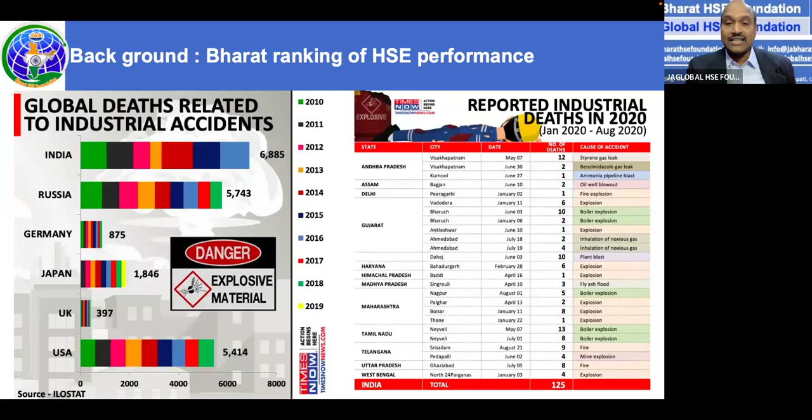As you see on the screen, there is an ILO, International Labour Organization, statistics. Unfortunately, India is on the higher side. And remember, these are only the reported incidents. There are so many unreported incidents happening, but our main aim is to support the industry, support the HSE professionals, and support the HSE fraternity.

With that aim, we started our foundation. It was virtually launched on 25th March 2022. Again, during COVID time, everything was virtual, so we adapted virtual significantly for the benefit of our HSE profession.

That was Bharat HSE Foundation. Further, based on requests from different parts of the world, we started a Global HSE Foundation on 30th November 2022.

This particular foundation is not at all a membership organization. You don't need to pay anything to get the benefit from this. We are only giving back to the profession in association with professional organizations, corporate organizations, academic institutions, individuals like Dr. Hari joining today, philanthropists, NGOs and other things. So it's purely a giving back organization, no need to pay anything to join our fraternity at all.

And we have a mission, vision, and objectives. Our mission and vision is very simple: to support the HSE profession as well as HSE professionals, basically to do advocacy for our profession. Our objectives are advancing occupational safety and health among industry, academic institutions, and organizations, to support and promote OSH as a career choice among students, to inspire and develop leaders, to provide education and development opportunities. We also recognize individuals.

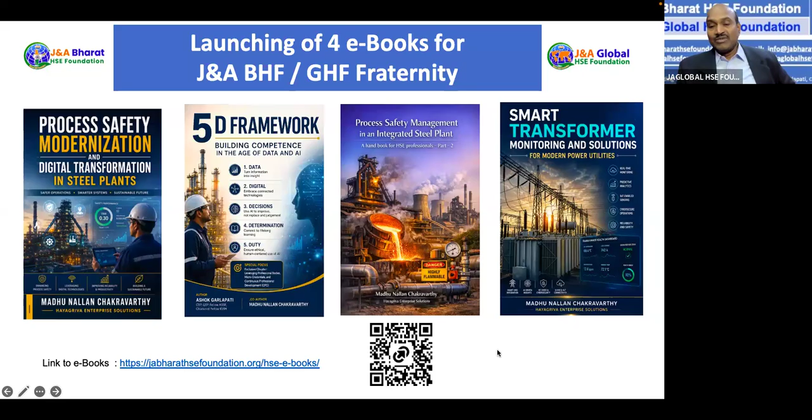We will be going ahead with understanding reactive hazards of chemicals and process safety management, a must-know for HSE professionals. Jitu Saab, are you ready to speak? I think you covered it all. The only thing I was going to add is that this is an excellent tool for developmental programs for students as well as full-fledged HSE professionals. They can further expand their knowledge from these books and use them as reference material.

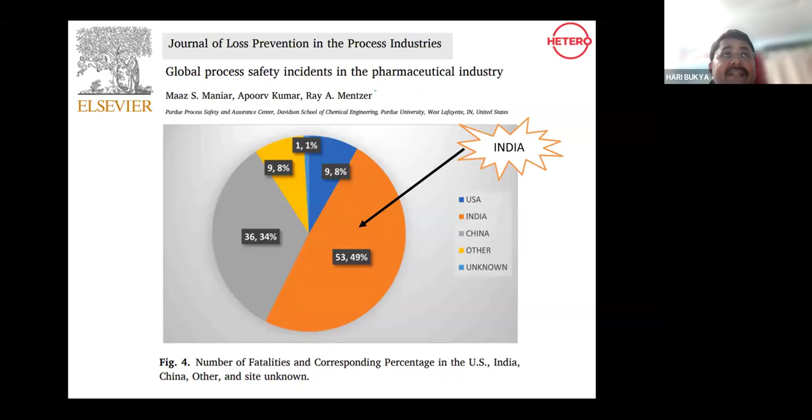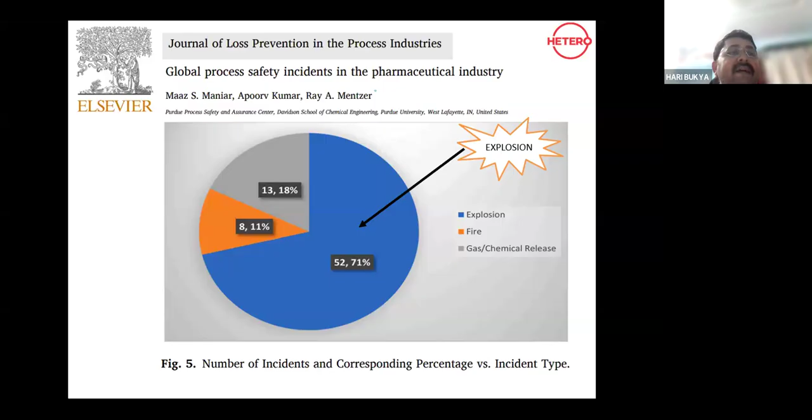This slide tells you which category the incident belongs to—maybe explosion, fire, gas, or chemical release. So again, there is an explosion. Nowadays, anywhere an incident happens in the world, India is playing a major role in incidents and fatalities. This one again shows the type of incident—explosions happening in India. If you see this in Hyderabad, Telangana, Andhra Pradesh, or Maharashtra, Gujarat—wherever the states—any incident that happened involved reactor explosions. This is the way I articulated it, collected from elsewhere in the journal.

So whatever we are doing right now—hazard awareness, I'm doing it, and you are going to do the identification, in a simple way. J&A Bharat, and also J&A Global, gives people a global opportunity and awareness about whatever hazards we have in safety, giving the best way to address it. So a hazard awareness and identification program can decrease global incident rates, fatality rates, and accident rates.

So it's the latest update, in May 2025, 13th May—the Maharashtra government has made some amendments. For every chemical reaction, if the occupier carries out any exothermic chemical reaction for the first time in the reactor or anything, they have to do a minimum basic process safety assessment.

So before going to the subject, there are a few slides. After these few slides, we'll move directly to the subject. This is the basics to help you understand why process safety is important.

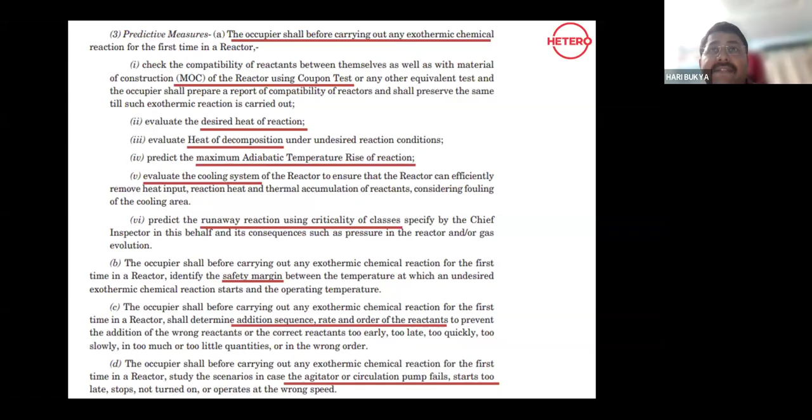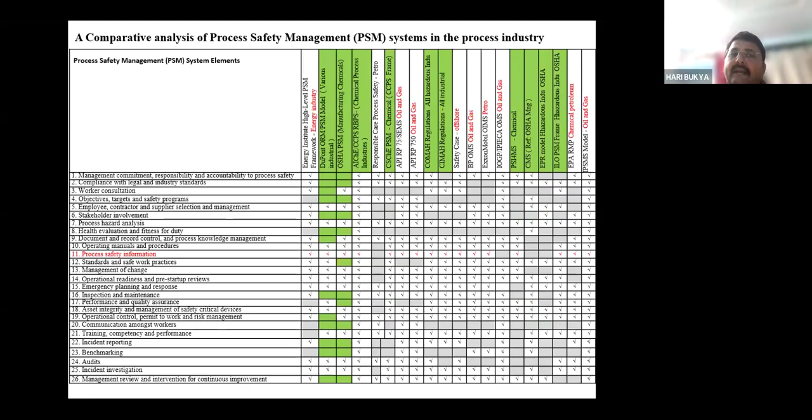Again coming to the topic of comparative analysis—many people say you should do HAZOP, please do HAZOP, please do ABR (activity-based risk assessment), do HAZID. Whatever the standard, we do it. But before going further, coming to a comparative analysis of process safety management systems in the process industries—in the world, there are 20 standards.

If you see in the first row, there are 20 standards, and in the first column, 26 elements. So which is the best one? It's mentioned that models like OSHA, CCPS, DuPont's, and ILO are more robust and more flexible in the pharma and chemical industries, as I mentioned.

If you see this in a graphical way, it shows which model is more robust and more flexible with respect to implementation of process safety management in the plant—whether for chemical, pharmaceutical, petrochemical, or oil and gas industries. So we can select based on this table. The IPSMS model works for oil and gas. The EPA RMP model works for chemical and petrochemicals. OSHA's, DuPont, and CCPS work for the chemical and pharmaceutical industry.

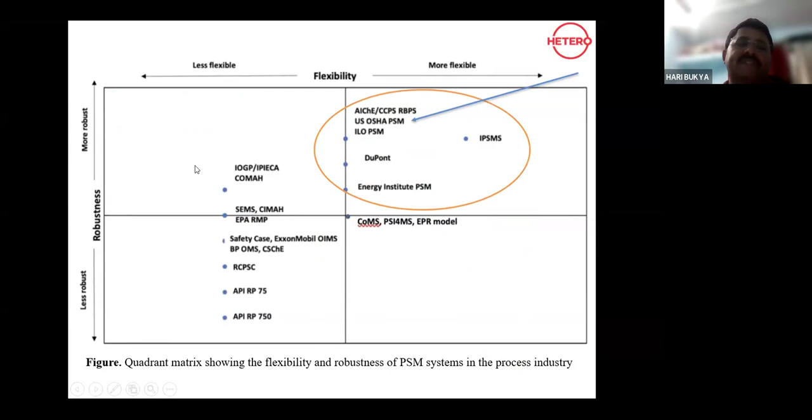So these are the mappings done with respect to 20 standards in the world, having 26 elements mapped on the screen. This gives a glimpse. I need to choose - my industry is this. I'm from a steel plant, I'm from a textile industry, I'm from a pharmaceutical. So we can choose it, and the best and robust one mentioned with respect to the manufacturing sector, like DuPont and Energy Institute PSM and CCPS OSHA, which have more flexibility and robustness. So this is a glimpse of the standards in the world.

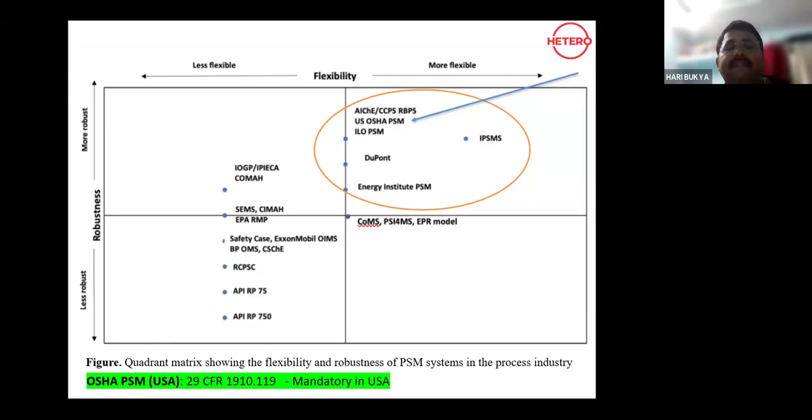If you see this, it is not mandatory in India to follow process safety management. We have the Factories Act 1948 as per the sections, which has different sections that we follow in India. But particularly in other countries, they have it mandatory, like in the US.

Coming to the part of risk assessment, in the early stage I told you many people talk about risk assessment - sir, I want HAZOP, I want HAZID, I want JSA, I want ABRA, I want what-if, FMEA, LOPA, bow tie. There are a lot of things, not all able to fit on the screen, that's why I've written only a few.

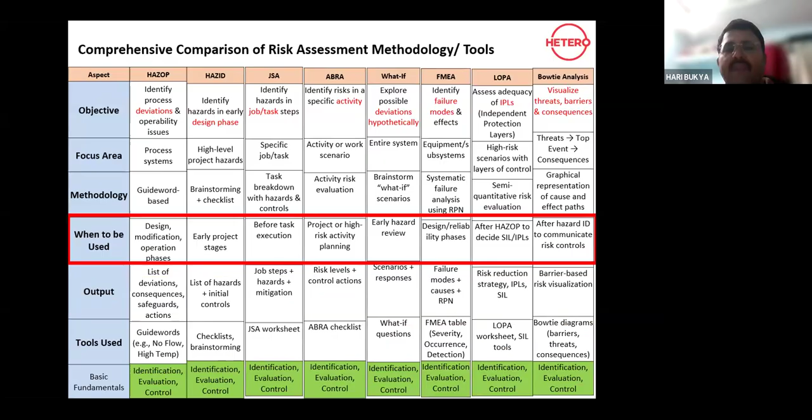If you see this, everything has a specialized use - when to be used, simple way. HAZOP I need to use in design and modification phase. HAZID I need to do in early project stage. JSA, before task. So any non-routine activity, this has a significant role - JSA. Any non-routine or routine activity, you can capture it with job safety analysis. Any routine activity you can do in ABRA, or what-if analysis for your process or anything you manufacture. So every tool mentioned here has a significant role for when to be used.

But the basic fundamental of any tool is the risk assessment definition - identification, evaluation, and control. Simple way, as we are learning in this session. So any tool, if anybody tells you they want to do something - design, project, high risk activity - you need to decide if it's a SIL activity or hazard communication, whatever we do, the simple way is we need to understand what risk assessment is. I need to identify, I need to evaluate, I need to control. So we put this in different formats - this is the comprehensive risk assessment methodology tool mentioned here.

Moving to the next one, which is the basic approach of process safety management standard. Every company has different types of understanding. In chemical and pharmaceutical industries, company to company, the process safety management standards which I mentioned in the previous slides - there are 20 global standards we have, and 26 elements we are mapping in that, right? So OSHA, CCPS, DuPont, maybe Energy Institute.

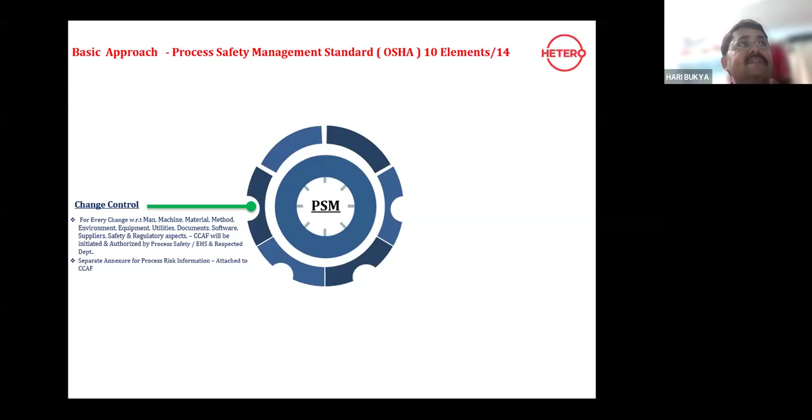If they want to change in man, machine, method, like all the M's, with respect to any physical scenarios or situations as well - immediately, based upon that, we give a recommendation, whether it is a process, an activity, a procedure, or equipment changes.

Based upon the change control approval, immediately I need to gather process safety information - data like thermal stability, reaction calorimetry data, powder safety data, gas evolution data, stoichiometric balance, compatibility charts, nitrogen blanketing, emergency vent sizing, condenser vents, occupational exposure limits and bandings, P&IDs, PFDs, and interlocks. I select whichever is fitting based upon the particular activity change.

So you need to do the HAZOP or HAZID, as mentioned in the previous slide. If we want to do activity-based risk assessment, we do HAZOP, job safety analysis, what-if analysis - whatever is selected, we apply it for that specific activity to ensure compliance.

So process safety information followed by process hazard analysis. Whatever we developed in the process safety information and process hazard analysis was kept into the operating procedures. Now coming to the operator - he may not be a chemical engineer, he may not be a chemist standing in front of a reactor. He's manufacturing pharma or medicine in the plant and doesn't know the chemistry, so he needs to understand it.

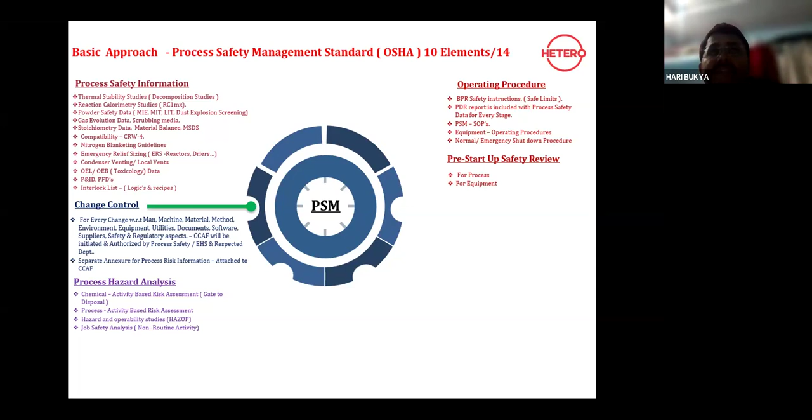And then when the process starts, we do pre-startup safety review, PSSR, with respect to process and with respect to equipment. So this is the basic one.

When you involve this, it immediately captures employee participation - the employee involved in PHA, the employee involved in the operating process. This employee participation is captured through involvement in PHA, incident investigation, mock drills, safety committee meetings, near miss reporting or process safety near miss reporting, and PSSR - shown in the right side, down third row of the screen.

Similarly, any incident happens, the investigation, or mechanical integrity parts with respect to preventive maintenance, calibrations, inspection for reactors or atmospheric pressure storage tanks for solvents, acids, chemicals, pipelines, stack lines, or valves and equipment. Whatever equipment I'm putting as asset integrity part, we call mechanical integrity - that plays a major role compared to all others.

This will be made as a chart and produced block-wise, and if required, product-wise as well. So simply, we are training them on shop floors in process safety - we train on process, we train on equipment, and we give hazard communications particularly with respect to process. This may be a classroom session or a toolbox talk for contractors or employees.

So this captures element 9, and the next one is emergency preparedness. Whatever emergency shutdown - process safety mainly concentrates on emergency shutdown in case a runaway reaction happens, what needs to be done. That includes shutdown procedures, on-site emergencies, off-site emergencies, evacuation plans, assembly, ERT, and mutual aids.

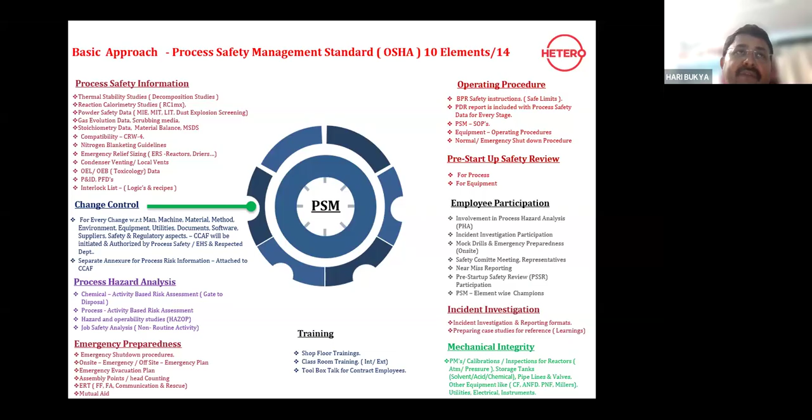So this is what I've shown with respect to OSHA's PSM approach, and this is the CCPS part. Whenever you choose the standard, CCPS and OSHA are almost similar, but CCPS has a few more elements, elaborately split into 20 elements, based upon your commitments and choices. There's a bit more thought, a bigger one, but still easy. When I was in Pfizer, I used to follow the CCPS standard, but now in India it's not required - because the need is, for lesser quantity, OSHA is preferred for pharma, chemical, or any manufacturing industries as part of process safety management.

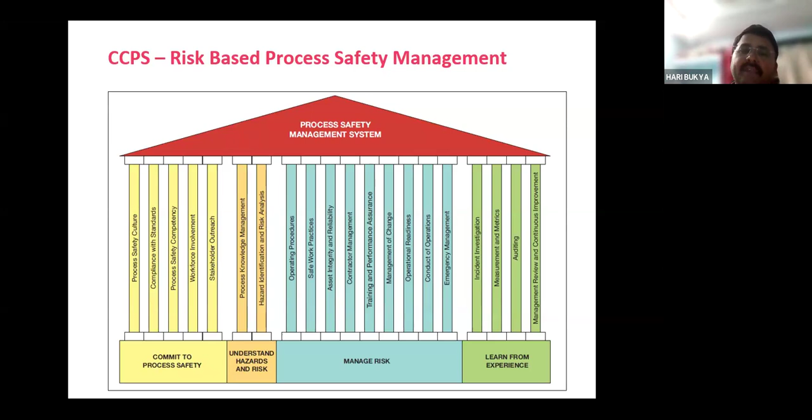Before going to this, I have a small story - the Chota Bhai, Bada Bhai story, sir. I think everybody is listening to the story - Chota Bhai, Bada Bhai, a lesson in safety culture.

This Chota Bhai is a very naughty guy, and he intentionally asked many things. He's very curious to learn, and this Bada Bhai was very intelligent to answer his questions. Chota Bhai asked Bada Bhai...

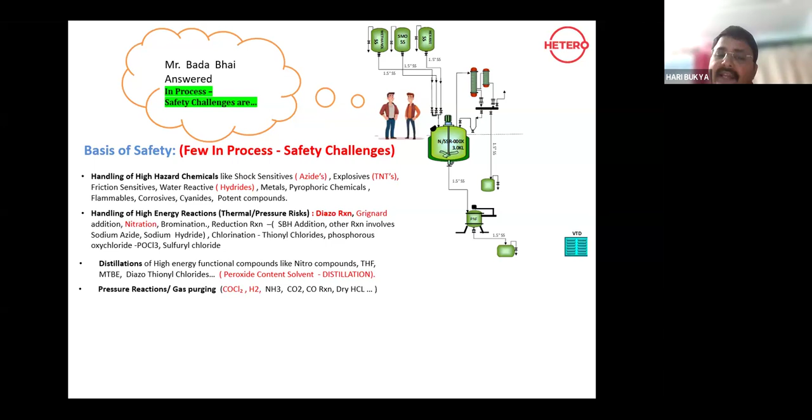Coming to another challenge we have: pressure reactions, with respect to hydrogenation and CO reactions, is a challenge. Handling utilities is also one of the bigger challenges - to cool adequately and timely. If you're not provided cooling for exothermic reactions, again, it's a bomb.

Powder handling, cross contamination, improper handling. One explosion happened in a company in Hyderabad, a pharmaceutical. They were doing the 24th batch. The reactor is empty. They are charging some chemical, some powder, into the reactor. They had not cleaned it properly.

I'm going a little fast. If you're okay with that, that's better, otherwise I'll slow down. So the thing is, they are charging material. Sorry sir, go ahead sir, go ahead.

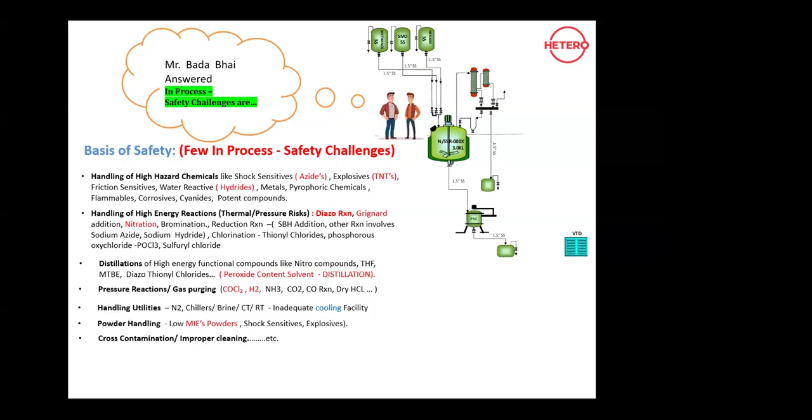So in the reactor particularly, it's an empty reactor, the 24th batch they are doing. They charge almost 13 bags into the reactor. On the 14th bag, during the charging of powder into the reactor, it got exploded badly. The entire building collapsed. We went for an investigation.

We came to know that after this, the contract casuals generally clean the reactor. After his cleaning, he says okay. Once he says okay, the supervisor says okay, the block manager says okay, the block head says okay - but the signatures were carried out without actually checking.

During discharging, the reactor contained the previous chemical called toluene. Toluene is a highly resistive material - it's a non-polar solvent, it generates static. Already there was powder present, so during powder charging there was charge generation. The reactor exploded, the entire building collapsed. There was huge injury but fatalities were luckily avoided since they were safe.

In process, high pressure - during high pressure reactions, generally people want to take samples. That was one challenge I faced when I was at Pfizer in the hydrogenation process. During high pressure, I want to take a sample, but I cannot reduce the hydrogen pressure, I cannot take it. So that kind of thing happens in process - otherwise during the process I need to open the manual or do some activity, it's a challenge.

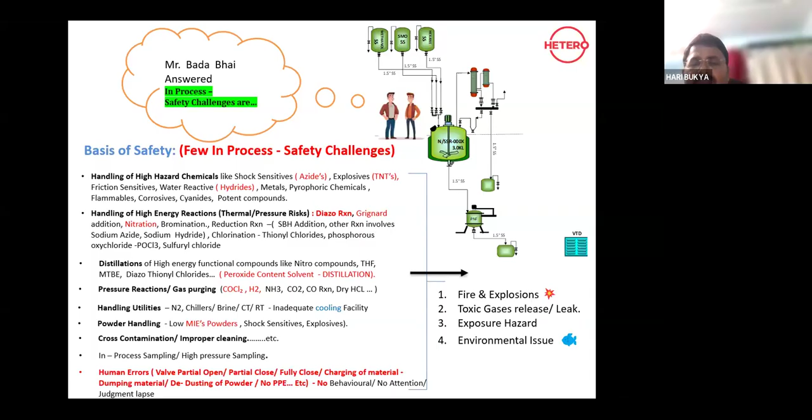These are a few of the in-process challenges. Finally, any of these challenges result in fire and explosion, toxic gas release, and exposure hazards.

So I'm just getting into the subject. I haven't started the subject yet. Let's go into this, and after this slide, we are going to have an understanding about our real subject of chemical reaction hazards.

So now, these are the minimum in-process challenges. This slide will help many people understand the typical basic unit process and unit operation flow in a chemical and pharmaceutical industry. There will be a reactor called raw material charging in one reactor, which I'm showing as the first reactor. Then it comes to synthesis, where the unit processes will happen.

Unit process will happen, and then we will come to the workup. The remaining, which is all our unit operations, like workup operations, organic layer, aqueous layer, distillation, crystallization, maybe filtration, drying, maybe milling, mixing, sieving, and finally packing. This is unique, meant to make you understand if you're not from chemical or pharma industries. This will be a typical basic process, unit process and unit operation flow in a chemical and pharmaceutical industry, sir.

Is it okay? Voice is audible, sir? Screen is clear? Yes, perfect. Go ahead. Clear, sir. Yeah, clear. Fine, sir. Clear. Yeah, we have not yet started the subject, sir, and please, it's a very curious one. We have not yet started the subject.

So before going to the subject, we started working on the process safety package. So any new product comes, any recampaign comes, any modified process comes, or any product which is continuously happening in the plant, it may be a chemical or pharmaceutical industry, this package PSP - I named it process safety package.

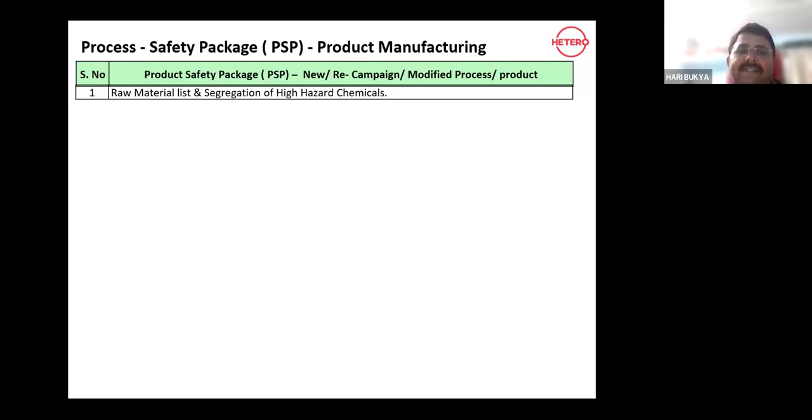First, he has to get the minimum raw material list. He has to make a Bible on this. So the process safety package is a Bible of that entire process - we need to do raw material list, segregation of high hazard chemicals, MSDS, chemical compatibility with support of CRW4 software, or any other software supports well and good.

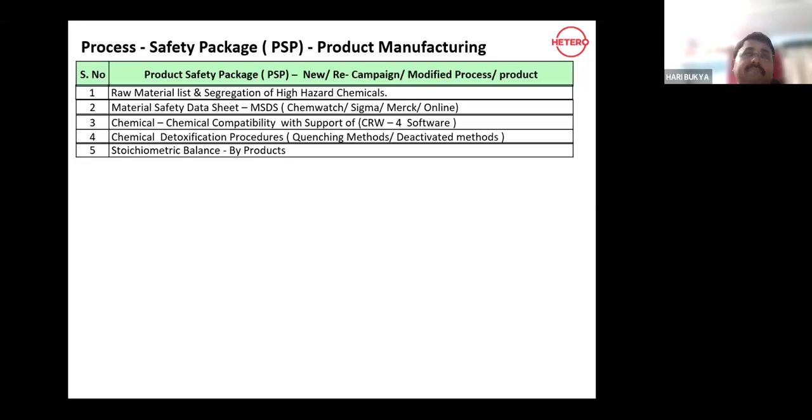Detoxification procedures of your quenching materials or deactivation methods of the process, stoichiometric balance and byproducts, gases related, emergency relief system calculations or local vent calculations or dump tank calculations, industrial hygiene data like occupational exposure bandings or occupational exposure limits with exposure controls and recommendations, particularly if your material is highly potent.

In the process safety data, you need to generate thermal stability data, reaction calorimetry studies, powder safety studies for RMs, KSMs, intermediates and APIs. Many people ask, so I will do only API. Then my question is, what is your basis of safety?

If somebody asks what is your basis of safety - yes, I handle a powder. If you ask me the basis of safety for KSM, because KSM is only used in the reactor, it may not be used for the powder processing. So that's the reason I'm just putting this word with you all.

You need to do the process evaluation checklist, particularly with respect to process and equipment. You need to gather the P&ID as per the standard, maintain the PFDs, and conduct HAZOP or maybe any other suitable tool, along with effluent generation data and coupon tests.

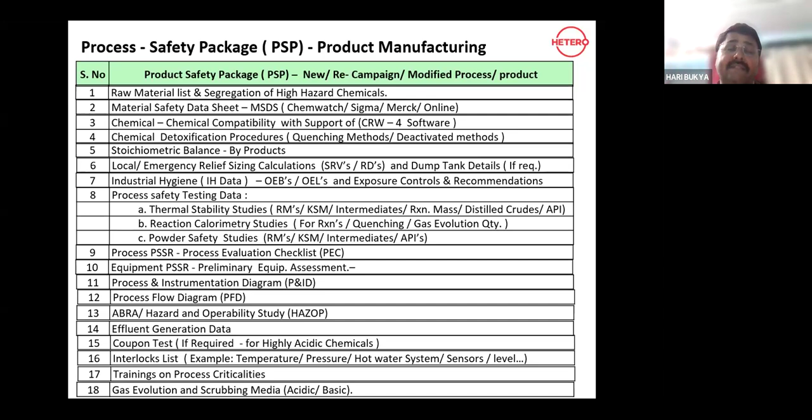So these are the few things. If you can generate more, well and good. These are the basic process safety package requirements for product manufacturing in the manufacturing plant. This gives you entire knowledge of your subject, and you will manufacture with high safety, and your quality and confidence will build up on your process.

So coming to the real subject, which I'm going to give a small understanding about - chemical reactivity hazards - as I committed to you before leaving this session. Before leaving this session, particularly, you will understand whether this process is safe or not.

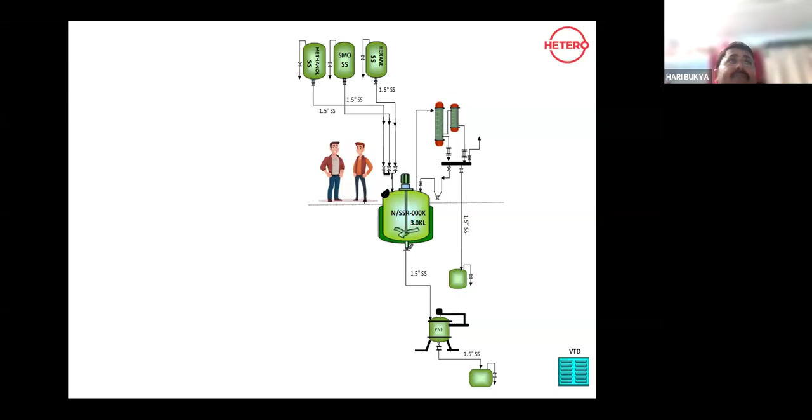So these questions are, I think he's asking how to know my process is safe or not. This Chota Bhai is asking Bada Bhai, how to know my process is safe or not. The simple question, even though you may ask me or you may ask the experts of process safety, stating that how to know my process, which I am manufacturing in the plant in a reactor or maybe a continuous reactor, is safe or not with respect to chemicals particularly.

So immediately Chota Bhai asks, how to know my process is safe? Bada Bhai said, Are Dada, I'll tell you one thing. If you stand in front of a reactor and ask 5 questions, Panch Pataka, we can call it Panch Pataka, 5 questions to be asked standing in front of a reactor or maybe a reaction which is happening in the R&D, you stand in front and ask these 5 questions, this Panch Pataka, you will come to know that this process is safe.

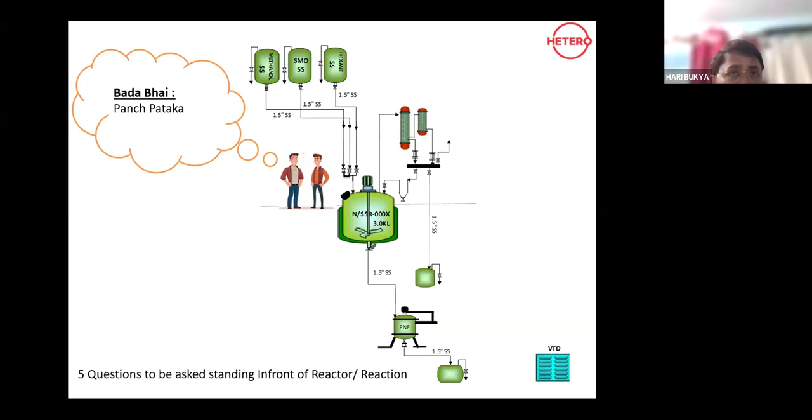Simple way, the first question - before going to this first question, this is just to make you understand - in the world, how many processes are there? Just to make a note, stating that in the world, it may be any country, how many processes are there? First question.

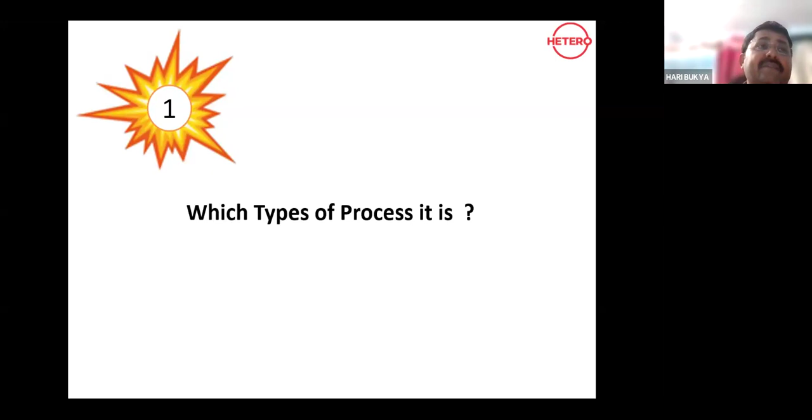So the question is, which type of process is it? In the world, there are 3 types of process. One is batch process. Second is semi-batch process. Third one is continuous flow process.

Simple way, I'm just coming to the batch process. Batch process means, if you see in the picture, no need of explanation in this literature as well. See, if you are cooking rice in a pressure cooker.

What we will do in a pressure cooker - we will add water, we will put rice, and we'll put some salt, and we'll fit it and heat it. Simple way, all the reactants fed into the reactor at the beginning of the process, and the products are removed when the reaction is complete. Similarly, in a reactor we'll add A plus B plus C plus D and we'll fix it and heat it. That kind of process is called batch process.

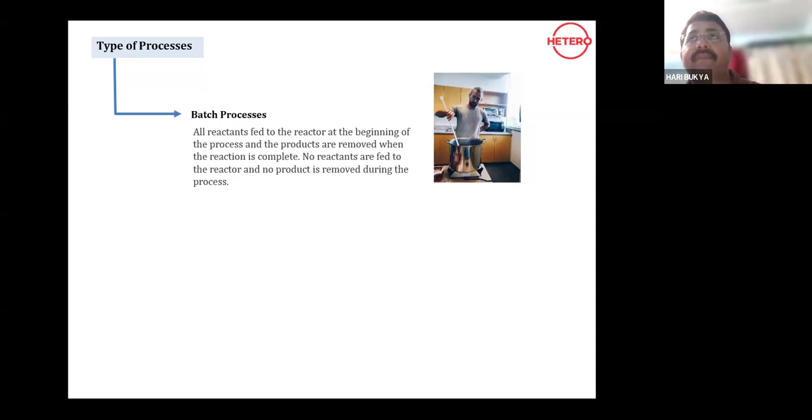Second one, which is like semi-batch process we have. In this semi-batch process, to make it easy to understand, like when we make any curry - we'll heat the pan, we'll pour some oil at different temperature after heating, we'll put some onions, mirchi, something, X, Y, Z - so that means semi-batch.

So you're doing it - any semi-batch process is one where reactants are periodically added. I'll add at a certain temperature, periodically added, or products are periodically removed. Whatever I wanted, I will add it; whatever I wanted, I will remove it. Books define semi-batch process as neither batch nor continuous. Simple way, whenever I want at different times, I'll add it, whenever I want at different times, I will remove it. Simple way, like curry - I'll put some masala, whatever items we generally put, vegetables one by one.

So whenever we do a periodic addition, we call it a semi-batch process. Like, I will add A plus B plus C in the reactor, then I will slowly add D into the reactor, addition of D into the reactor for certain hours. I'm just making you understand this before going into the subject of process safety activity. So there are 3 types of process.

Out of these 3, there is continuous flow. Like if you see there are 2 beakers going in the same flow - continuous flow process - these 2 inputs which are going from the beakers and the output from the reactor are constant, the flow is constant. This reaction we call continuous flow process.

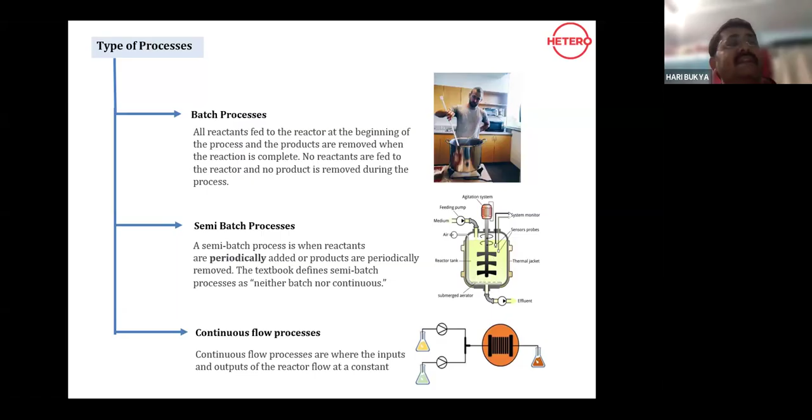Again the question: which process is safer, batch process or semi-batch process? I'll tell you, semi-batch is safer, where I can control it. Whenever I want to add, I'll add it. Whenever I want to stop, I'll stop it. That's the reason it is declared as per the Stoessel criticality class. Francis's book also says that semi-batch processes are controllable. We can control the reaction as well.

The first question is over: which type of process. So that is, first, process is batch, semi-batch, and continuous. The second question before asking you: in the world, how many reactions are there?

As this question goes, the second question is which type of reaction it is. As per the chemistry point of view, please note this point. Second question is which type of reaction it is. So as per the chemistry point of view, I'll tell you now. The next slide will come from a process safety point of view, to make you understand, standing in front of a reactor, oh this is this kind of reaction, so I can predict this. The second question is very easy. In the chemistry point of view, there are four types of chemical reaction.

One is synthesis reaction: A plus B, if you add A and add B, A to B, it gives AB. This kind of reaction we call a synthesis reaction. The decomposition reaction: AB, if you heat it, it will break up and give A and B. So a complex substance breaks down into two or more simpler substances. These are reverse of a synthesis reaction - decomposition reaction.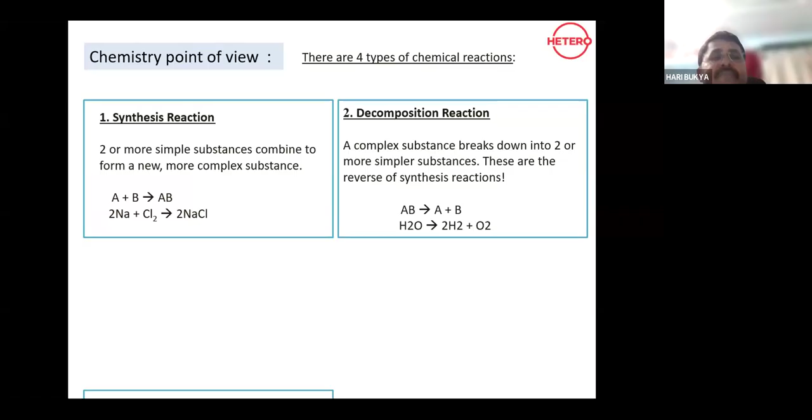And the third one is the single replacement reaction: A, you're adding to BC, so then it will become AC plus B - single replacement. And the fourth one is double replacement: AX you're adding to BY, so this will exchange to AY plus BX.

If you see the formulas, magnesium carbonate added to HCl gives magnesium chloride plus H2CO3, carbonic acid. So in a simple way, from the chemistry point of view, there are these types of reactions.

But with respect to process safety point of view, as I told you, there are two processes: one is semi-batch and batch process. Majorly, maximum, out of 95, 90+% will act as a safe semi-batch process.

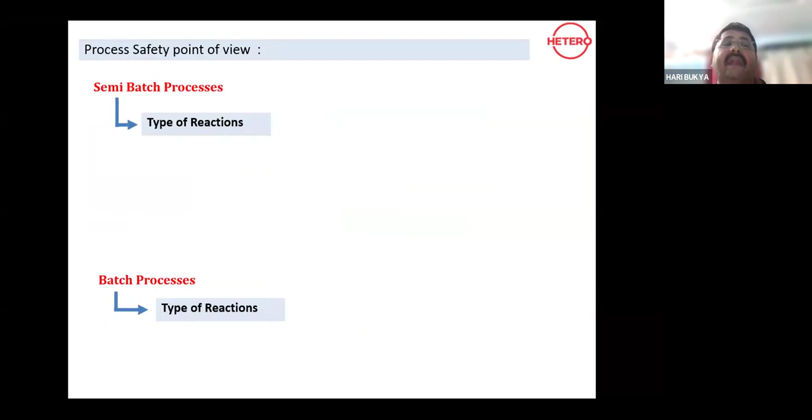In semi-batch, there are three types of reactions again. Guys who are listening to this session, I'm telling you, this kind of literature you will not get anywhere. This is completely knowledge driven. We have proven it in thousands of reactions conducted in process safety - not just by me, thousands of reactions happening all over the world - and Stoessel also clearly states that this type of reaction falls into this kind of reaction category.

So in semi-batch, please be keen: standing in front of a reactor, first question is whether it is a batch process, semi-batch process, or continuous process. First question is clear. Second question: which type of reaction is carrying on in this reactor? In semi-batch, there's an instantaneous reaction, which may be called fast. I'll explain - after completing these 5 questions, you'll definitely understand, oh this is an instantaneous reaction, this is a fast and dose-controlled reaction.

So the second type is accumulation reactions, and the third is delay type reaction. What is this? Let's understand in the next slides what instantaneous, accumulation, and delay type reactions are. This chemical reaction hazard is the same all over the world. In the world, anywhere you go, any country you go, the same thing will happen, the same reaction.

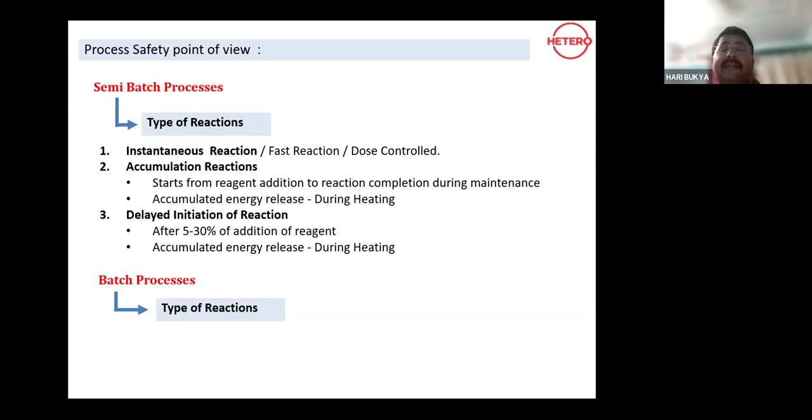This applies to the whole world. This data is literature as well as practically proven. In a batch process, as I told you, everything is done - you heat up, that's it. That process we call batch process: energy release during heating and maintenance.

Now coming to this part, this is a real graph which I captured from the reaction calorimetry I showed in the earlier slide. The second question is which type of reaction this is - out of three: instantaneous reaction, accumulation reaction, or delayed initiation of reaction. I'm coming to instantaneous. The first reaction here is instantaneous reaction.

If you see the screen, as soon as addition starts, this is the graph. The green color mark is the addition with respect to time - at so and so time I started addition, at so and so time I stopped the addition. As soon as the addition happens, if you see the graph, this is the addition time, addition happening over the period from so and so time to so and so time. As soon as addition starts, heat generation is seen in the isothermal calorimeter. This is a real graph taken from the calorimeter - once I started adding hydrogen peroxide into the reactor, immediately there was heat generation.

The pink color mentioned is the heat of reaction - we call it overall enthalpy, but I mean heat of reaction. As soon as addition stops, heat generation stops. So whatever heat generation is produced, we calculate it here - this is the heat generated. That calculation will be given to the people, and they will understand.

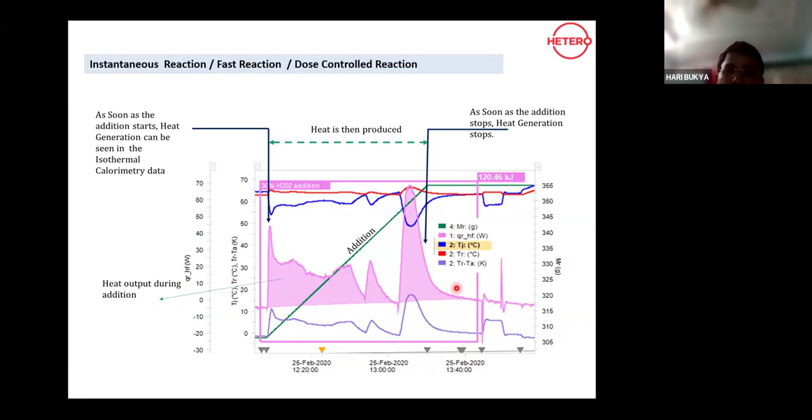Simple way - I added addition into the reactor. It started at 2 o'clock, reaction initiated. At 3 o'clock he stopped the addition, but the reaction is still going on, till the night. So in our BPRs we write: charge the reaction, KSM into the reactor and maintain for 12 hours. That kind of reaction we call accumulation reaction.

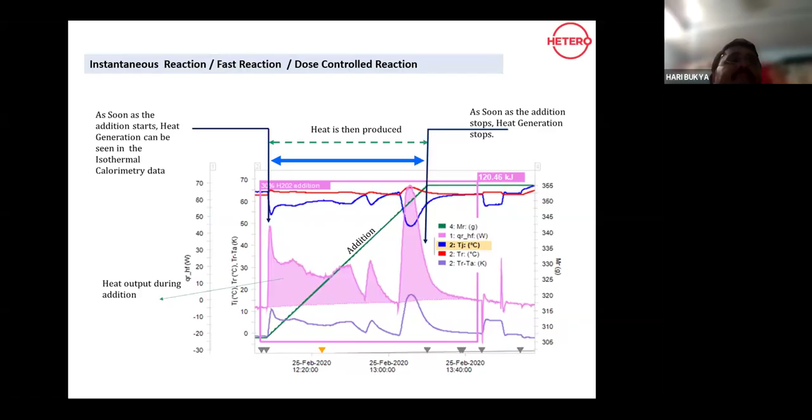Simple way - I started adding the chemical into the reactor at 2 o'clock, stopped the addition at 3 o'clock, and the reaction is complete. This kind of reaction we call instantaneous reaction - fast reaction, dose controlled reaction. That means if I drop one drop of chemical into the reactor, immediately that one drop reacts and stops. If you drop 100 liters, it reacts with 100 liters and the reaction stops. That kind of reaction we call instantaneous, and the kind where after addition the reaction continues for several hours, we call accumulation reaction type.

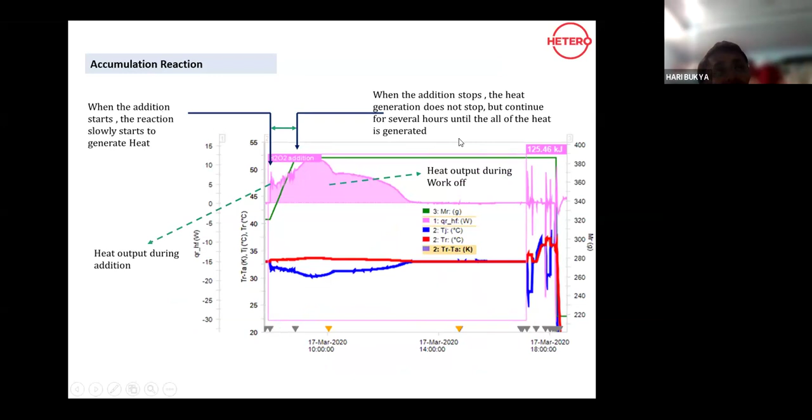When addition starts, the reaction slowly starts to generate, right? When addition stops, it does not stop but continues for several hours. This is real data, real graphs taken from RC1MX, Mettler Toledo, which is a monopoly in reaction calorimeters particularly. If you see this graph, there's no need to explain much more to make you understand the delayed type of reaction - this is how chemical reactions work in the chemical and pharmaceutical industry.

They will understand this kind of very dangerous Grignard reactions. See, initially what I did, when the addition starts, if you see this green line, I started addition at so and so time, at 2 o'clock. But later, when I started addition, the reaction does not have any significant heat, and no significant heat is generated for the first 15 minutes of the reaction.

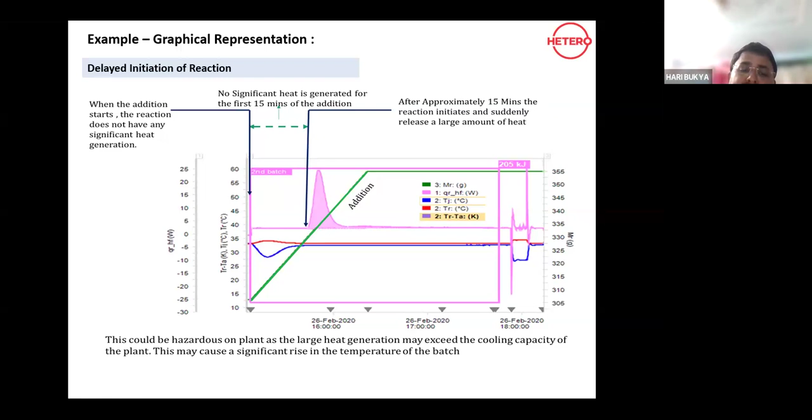If you see, after approximately 15 minutes, the reaction initiates, and a sudden large amount of energy is liberated. This kind of reaction, which we observed in R&D as well as in batches, is very dangerous on plant scale, as large generation of heat may exceed the cooling capacity of the plant and may cause significant rise in the temperature of the batch.

This example, which I'm showing, is a real graph of Grignard, 1-bromobutane addition. In the first lot I added immediately. Later, after some minutes, I added at 8:40, but laterally at 8, 9, 10 or so, there was a sudden peak rise of almost 63 plus degrees. That means my process temperature is exactly 65, and here is 65 plus 65, almost 130.

So this shoots up when you add it in a small quantity, the temperature shoots up from 65 straightforward to 130 degrees. If you see in the graph also, this will reach up to 130 to 140 degrees, which is a calculated one. A sudden rise of temperature, we call this a delayed type of reaction.

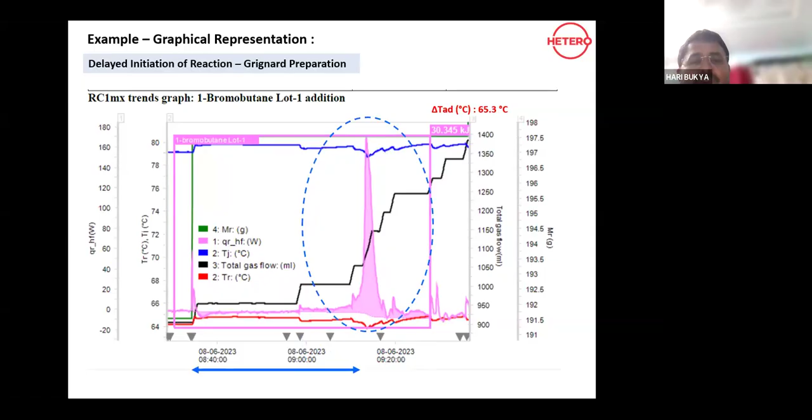The same difference, you see that. So this same graph, which is just a continuation of the previous slide - after 10% addition of reagent, the addition starts, the reagent does not have any significant heat generation. After approximately 60 minutes, the reaction initiates a sudden large release, and the heat liberation during the remaining 90% of the release, we call a delayed initiation reaction.

So in the second question, how many reactions do we have? Three reactions. One is instantaneous - that means whatever I add in the reactor immediately reacts, reaction is over. The second one is accumulation reaction - I add in the reactor, it starts initiating, but later, after stopping also, the reaction continues. Accumulated reactions. And the third one is delayed type.

I add it at some time, and laterally, whenever it wishes, it gives a lot of energy suddenly, in a pocket. This could be hazardous on the plant, as large heat generation may exceed the cooling capacity of the plant. This may cause significant rise in the temperature of the batch. So these are the three processes which I mentioned.

So second question is very clear. First question, why am I repeating this - this kind of knowledge which I'm mentioning on the screen, you may not get from many people. Why? Because this was literally made not just practically, we got it from literature, multiple sources, and we are trying to give good education to people to avoid accidents and explosions in the plant.

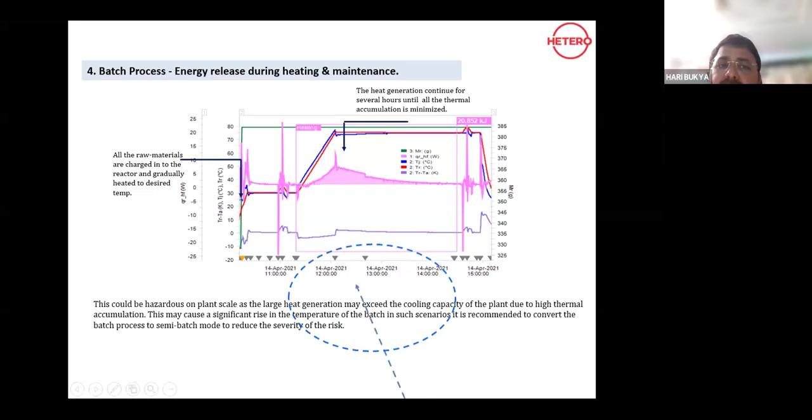So now, as 2 out of 5 Pataka questions - the first question, as I told, type of process, type of reaction. The third one - why I'm stressing this particularly is these are things you need to keep in your mind, as well as on paper - 5 questions you ask when you stand in front of a reactor. I'm damn sure you will tell whether the process is safe or not. Simple way, the third question is how much adiabatic temperature rise?

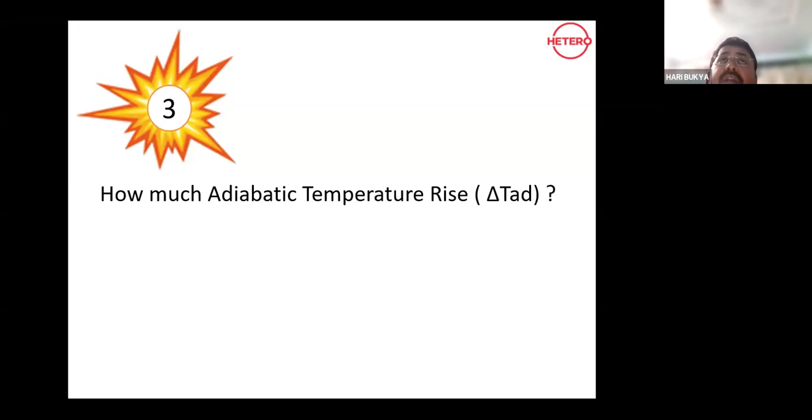That means many people may not pronounce this on the shop floor because they are not chemical engineers, they are not AB chemists or R&D chemists, they are mainly operators who charge the material. So they need to understand - so Dada, what is the adiabatic? How much adiabatic temperature rise? That means how much exothermic rise?

Sir, my process temperature is 40 degrees or 35 degrees. So at process temperature, I add some chemical. In reactor, A plus B, I want to add C into the reactor. How much exothermic will come? How much will the temperature rise from 35 to how much? 45, 55, 60, maybe 10 degrees, 20 degrees, 30 degrees, 40 degrees, even 100 degrees rise.

I have seen up to 800 degrees in one of the batches, which I observed by calculation. We stopped the reactor and immediately drained it out, particularly in the small jacketed reactors used for reaction calorimetry. Practically we have reached up to 500 as well. 500 means it will not be stable, but the calculation shows our cooling capacity can take it in. So this kind of reaction we have experienced - that is an explosion runaway.

No need to worry, we'll discuss that in the next slides. So the third question is: sir, in my process, if I add this material C into the main reactor where we have A plus B, how much exothermic rise will occur? 10, 20, 30, 40, 50 degrees?

If he says, if you add this, you will get 30 degrees rise. So your process temperature is now 35. Your adiabatic temperature rise is 30. So 30 plus 35 equals 65. When these two mix up, it gives the maximum temperature of synthesis of reaction, we call it.

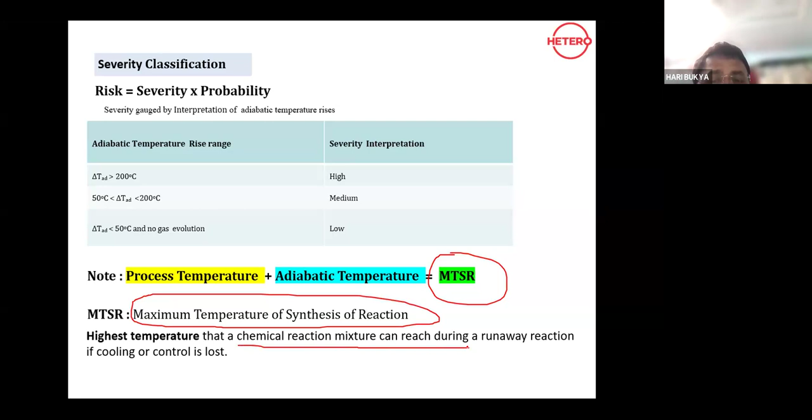For example, again, I'm telling you this to make you understand the next slide. My process temperature is 30. My adiabatic temperature rise, that means exothermic, is 200. 30 plus 200 equals 230 - MTSR is 230. This MTSR is nothing but the highest temperature the chemical reaction mixture can reach during a runaway reaction if cooling or control is lost.

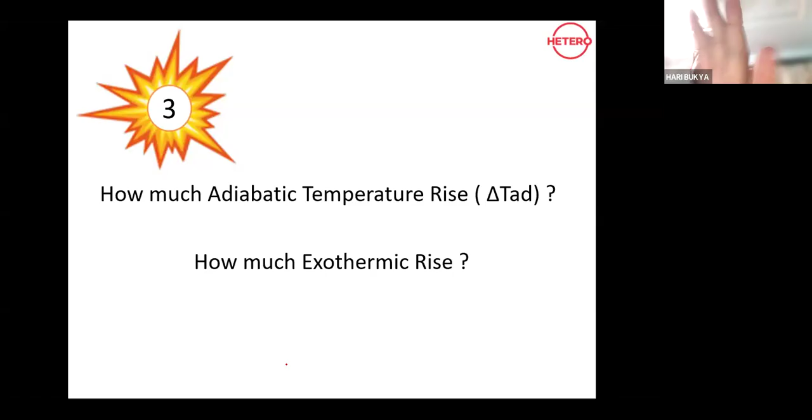So the fourth question, as I told you - the third question is very clear: how much exothermic? The process temperature is 30, adiabatic rise is 20. 30 plus 20 equals 50. 50 is your MTSR, which I'm showing on the screen.

So the fourth question, which I'm explaining, may be the hardest part, but once you know it and stand in front of a reactor and ask what is the exothermic - how much exothermic comes if I charge this - 10 degrees, 20 degrees, 30 degrees.

So in this fourth question, which I'm showing on the screen, decomposition. Sir, where is my decomposition temperature? Dada, for example, to make you understand the decomposition temperature particularly, the process temperature is 50, your adiabatic temperature rise, that means the third question, which has exothermic, is 100. 50 plus 100 is 150. If your decomposition temperature is below 150, then your reaction mass is a bomb.

Simple way, sir. Again I'm telling, don't get confused. Your process temperature is room temperature, that means 35 degrees. If you add some chemical into the reactor, that means A plus B is already there in the reactor, and you're adding some C into the reactor. So during the addition of C, what is the adiabatic temperature rise? Sir, there is adiabatic temperature rise of 100. Your process temperature is 35. So 100 plus 35 gives rise to 135. If your decomposition temperature is below 135, we call it a reaction bomb, critical class.

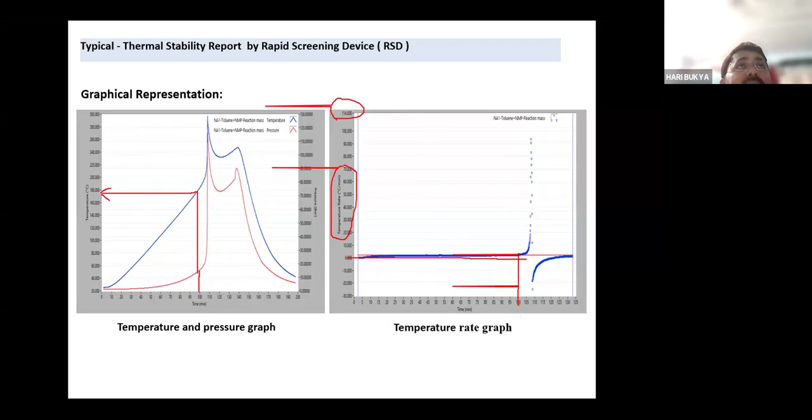Where it is exactly at the 100th minute means, again I'll calculate this. I'll put it at 180, 175 to 180. That started, initiated by decomposition, reaction mass is a bomb. So this is one of the ways to make you understand. Now you understand how much of exothermic it is and where is my decomposition. Simple way, 4 questions done.

Fifth question, which we call safety criticality class. Any reaction, A plus B plus C plus D gives rise to E, whatever it may be. So which kind of class is it, what is the criticality of the class? If your class comes out as 1 and 2, then it is not critical. If it is 3 and 4, again it is critical. If it is 5, you need to redesign it. This is the safety process criticality class.

So if you see this table, this is the increasing order of temperature. That means the temperature is increasing more, or maybe criticality is increasing more. With a few examples, as I told you, MTT is nothing but the boiling point of the chemical or solvent.

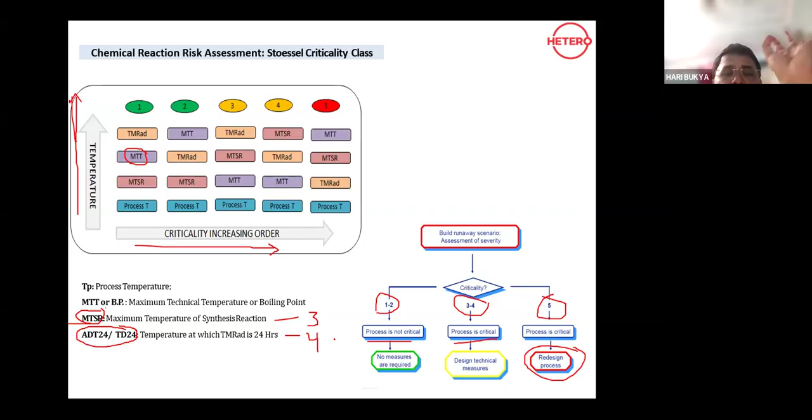MTSR, I already told you, maximum temperature, this is the third question which I am asking. Already you know the process, you know the reaction, you know the MTSR, you know the decomposition temperature. Now, a small understanding to make it clear. So any reaction you pick up, particularly, I want to take a chlorination reaction.

This is real data, guys, who are seeing the screen. These are the real data which I'm mentioning on the screen. There is particularly one plant manufacturing some chemical. The reaction type is chlorination, and DMF. They are doing some DMF addition to the reaction mass. So just we apply this.

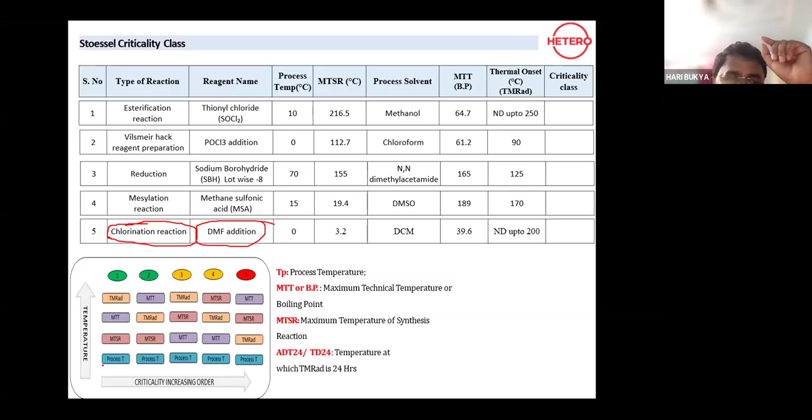You see this, this is increasing order of temperature, right? I'll put process temperature as 0, 0, 0, 0. If you see anything at 0, 0, I'll put it, making the marking of class type 0. Again, what is the next higher value, up to 0, 0, 3.2? MTSR is 0. Again, there are two things mapped immediately after the process temperature. What is next? It is 39.6, boiling point of the DCM. Immediately, boiling point, that's the MTT which is there.

Again, decomposition is not there up to 200, maybe there, but more than 200 we have not predicted it. So immediately we got it. If you see this class 1 reaction, which is mentioning this one, class 1 reaction.

To make you understand, another reaction called maybe acidification or Vilsmeier reagent preparation. Example is Vilsmeier reagent preparation. There is addition of POCl3, highly acidic nature, right? Again we'll mark it, the process temperature 0,0,0,0,0. Immediately after, what is the higher one? Boiling point, which is there, 61.

Immediately after, oh this is MTT, this boiling point is there immediately. There are two mapped, what is the next immediately? The thermal onset, that means thermal onset, which guy is TMRad. This is a class 4 type of reaction. You see this, this is a class 4 type of reaction. Simply, these 5 questions, Panch Pataka, will give you answer.

Oh, this is batch process. First question, type of process: which type of process is it? Batch, semi-batch, continuous. Second question, type of reaction: it may be instantaneous, accumulation, and delayed time. Third question, how much adiabatic temperature rise, that means exothermic, how much it is?

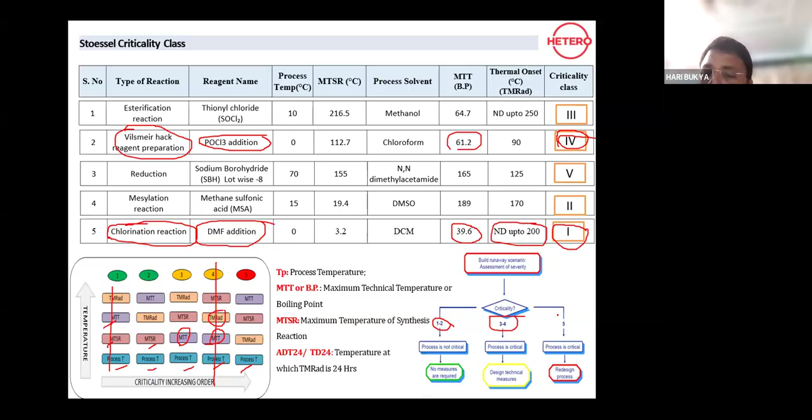A simple way, you may not be a chemical engineer, you may not be a chemist, you may not be an R&D chemist, you're not a scientist. Simply apply these 5 questions standing in front of a reactor, ask this Panch Pataka questions. Now you can declare this process is safe or not safe. So this is a simpler way: if it is 1 and 2, safe; 3 and 4, critical; and 5 is you need to redesign.

So more the scale up from lab scale to commercial scale, the risk will always be higher. So this is fire triangle, this is fire triangle particularly, as I mentioned to you. So this is fire triangle and explosion. This is a pentagon, that's explosion. And this is a deflagration rhombus and process safety triangle.

I'll go a little bit faster, to make you understand what exactly it is. So the difference is, for an explosion to happen, particularly a dust explosion, you require this 5: oxygen, fuel, heat, and it should be confined, and the material has to disperse. Then only explosion happens. If it is not confined, the material will only deflagrate, but dust cloud formation will be there, dispersion happens. This gives black particles during your milling, mixing, blending, packing, whatever activity. There was material already got deflagrated.

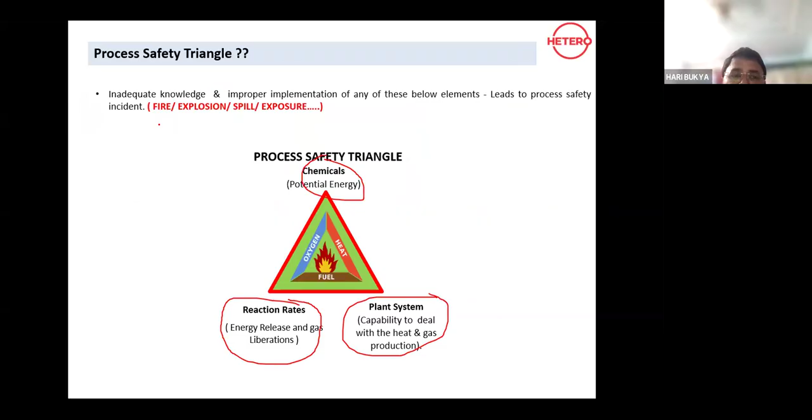So that kind of minimum understanding about dust explosion severity will be there. Understand, this is a basic fire triangle, this is a dust explosion pentagon, this is the rhombus which is the deflagration, and this is the process safety triangle mentioned here. Process safety triangle: if you miss anything, inadequate knowledge of any reaction rates, plant capacities, or chemical potentiality, you need to know, it can lead the process to fire or explosion or spill.

So a small video, based upon this, if you see this video, you will understand your process is safe or not, you will get it in this case. Simple way, a simple video, and we can slowly conclude the session. So you will understand this process is safe or not. Yeah, one second, I'm just coming back. I think guys you are seeing this video. So I'll not play much time, but to make you understand something easy.

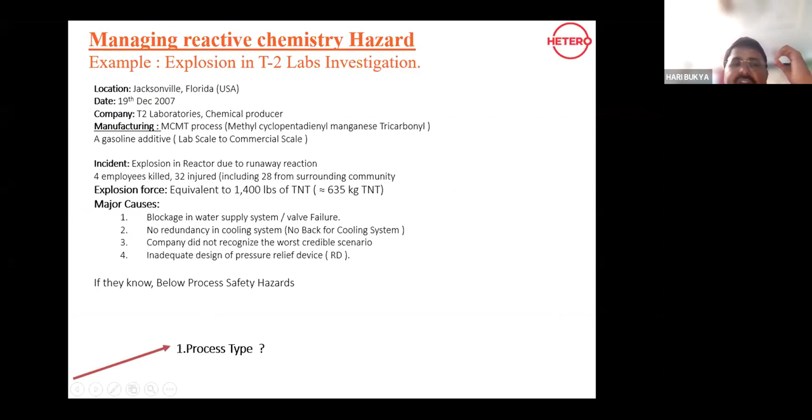Yeah fine, so if you see this video, do you know which type of process it is? So now first question is, which type of process it is? It's a batch process. All I dump it into the reactor, I heat it up to 300, 400, and again it's exothermic, up to 360.

It is not controlled. Another question to you all, what is the difference between exothermic and runaway? Exothermic is a sudden rise of temperature which can be controlled, it is in my hands, so that is exothermic. Runaway means a sudden rise of temperature which I cannot control. That's the simple difference. That's the reason we call it runaway reactions.

So particularly which type of process it is? So now based upon this process, we see that batch process is happening, right? Batch process. What is the reaction name? In batch process, only one reaction at a time. That's the reason I want to mention this, metal exchange, hydrogenation, like a metalation.

So how much exothermic amount is released? They don't know it. The energy liberation, they don't know it. How much cooling capacity they require, they don't know it. What is MTSR? MTSR means maximum temperature of synthesis reaction. How much it shoots, they don't know it.

See, MTSR is nothing but in case of cooling failure or dumping of materials, the temperature shoots to a certain temperature. This is called maximum temperature of synthesis reaction. So that they don't know. That means how much exothermic, they don't know it. Where is the decomposition? They don't know. Simply, what is the criticality class?

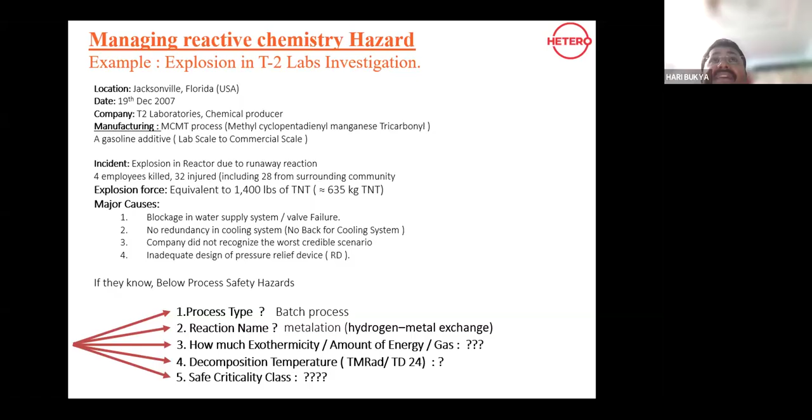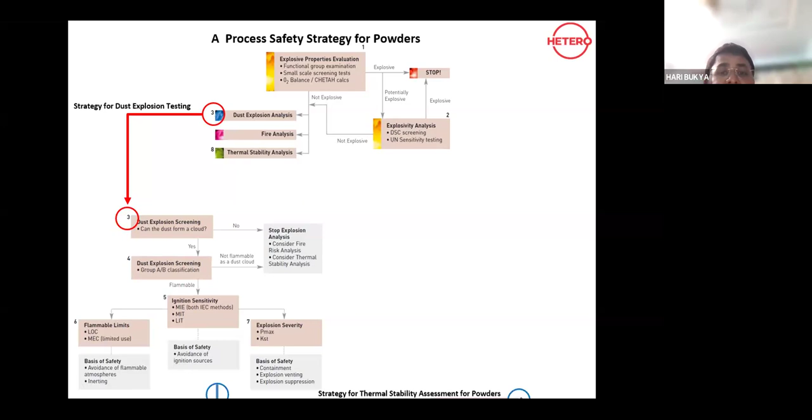This is a sequence of studies which I'm showing, which is captured and gathered from the field, because we have done thousands of powder safety testings in my past experience where we predicted the dust explosion characteristics. So a little bit faster I'm going, but this is the subject which we have to predict - this process safety strategy, particularly powders and dust explosion studies.

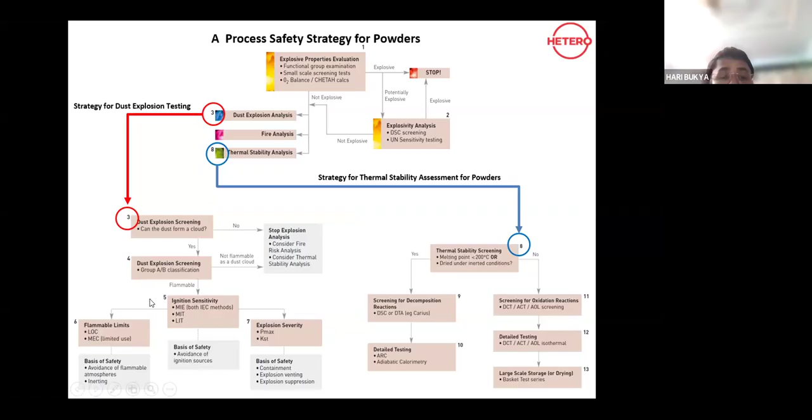So if you see this, I'll go a little bit faster. Explosion severity - last video, if you see this, you will understand what is the impact of the powder, even though the fistful of material may be 10 grams or 50 grams or 100 grams, the explosion which will give, you can understand.

Please let me know if anything sound is missing, or maybe video is stuck up, please. This final video, you can see this - very clear understanding about the dust explosion severity which is there. So they started. The video is getting lagged.

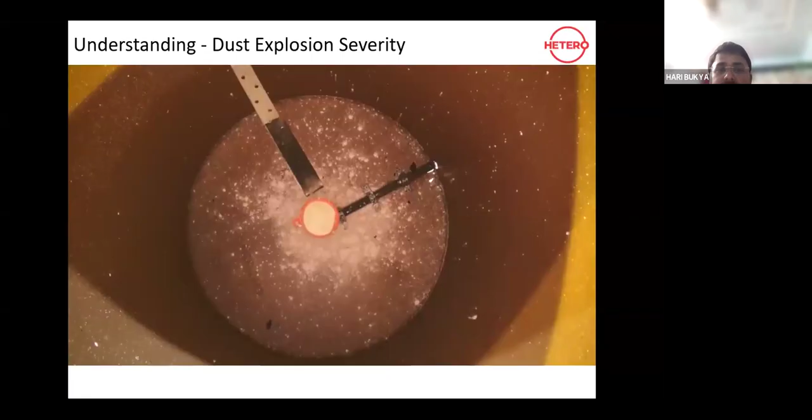It's clear sir now? The video is clear, sir, clear, but sir the sound now will not be. Yeah, go ahead, listen, go ahead.

There was a dispersion happening. The dispersion is happening now. So dispersion happened, only powder they dispersed, that's it, in open, not confined, they dispersed. In open confinement, there is no confinement, they just disperse. This is a dispersion. When we throw sand in the air, the dust particles will come the similar way.

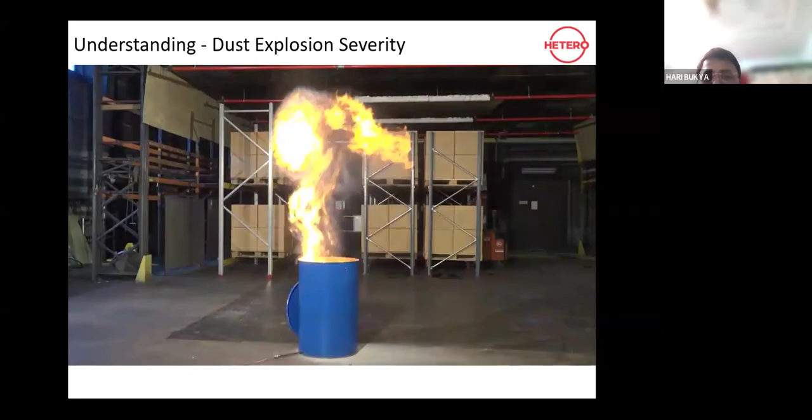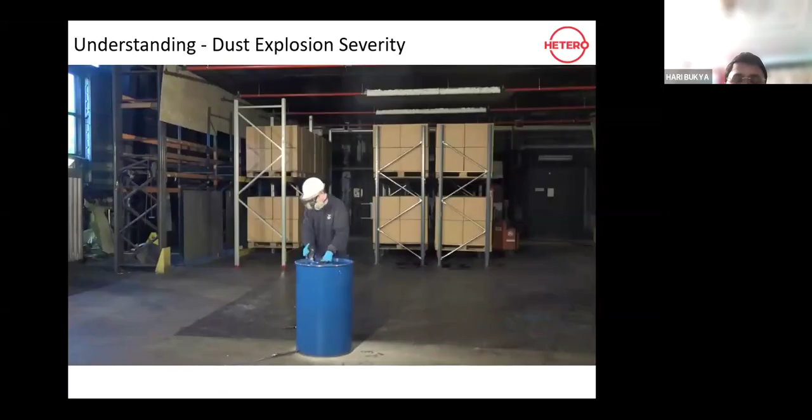A similar way, when it is confined, fine confinement, not completely - if you see this, its quantity is very less. There was the powder dust dispersion in a confinement. Again, a small explosion happened.

If it is another scale, again we put the same quantity of material and we can close it tightly. If you see this, complete tightly we have sealed it off, and now there was a dispersion. They started it.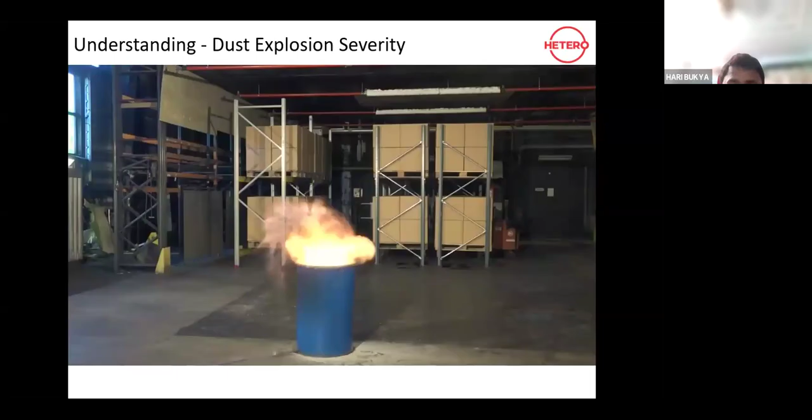So to make you understand about the dust explosion severity, see this video.

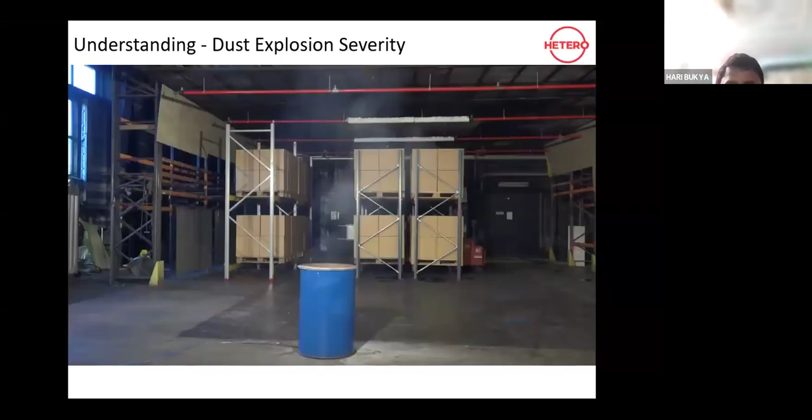So that's the way to make you understand the severity of the powder. So this is the one. And coming to the subject, yeah.

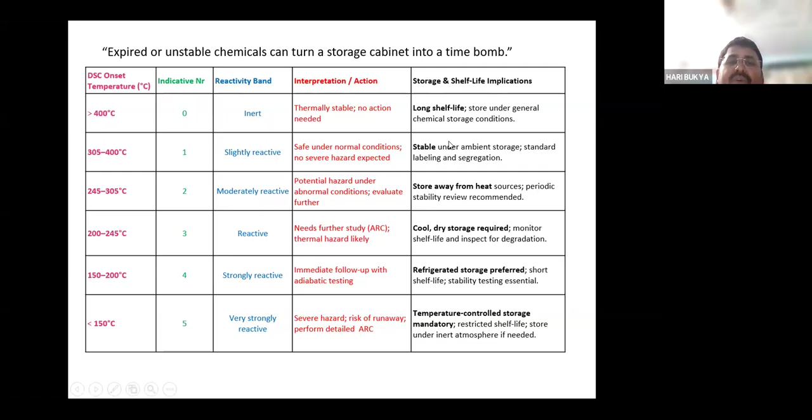So that's it, this is the basic understanding of chemical reaction hazards. Anyone can stand in front of a reactor or any part I explained today and ask 5 questions - Panch Pataka: process, reaction, exothermic, fission, and class. Ask these 5 questions in front of a reactor, and you will understand 100% of the severity of chemical reaction hazards.

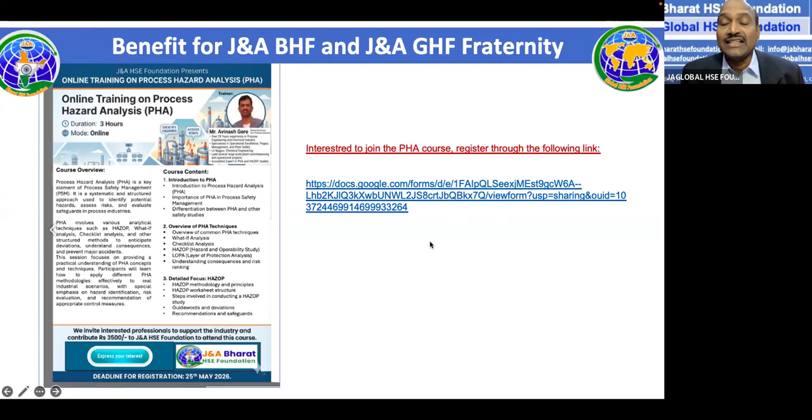Okay, now upcoming programs. As I said, every month we have an OKT. Another volunteer, Mr. Avinash, he came forward and he wanted to do a subsidized program. So he'll be doing an online training on process hazard analysis for a very subsidized amount. If anybody is interested, they can join using the link which I am showing there. You can take a screenshot. If you are unable to click the link, please go to our WhatsApp channel and ask for the information, you will be getting that.

Our 52nd OKT session will be on 26th August, Wednesday, 20:30 hours - the cost of neglecting safety. Our Dr. Hari talked about Panch Patakas and reactions, and we had so many incidents in our chemical and pharma industry in India. Dr. Srinivas is going to talk about the cost of neglecting safety, why safety is the most profitable investment for every industry. He's going to have good case studies and information. Again, we would like to thank Mr. Jayanti Lachaya for introducing this particular speaker. We are looking forward to his session on 26th August.

Again, remember participants, only on Wednesdays we have our sessions, 8:30 p.m., mostly on the last Wednesday of the month. So you can plan your activities.

So again, Mr. Dinesh was telling about the communication - we are having a plan to launch Toastmasters Virtual Club. That means everything online. So now the AP Chapter is in existence now from today. If anybody is interested, they can reach out to Jayanti Lachaya as well as Mr. Dinesh. If you are interested to improve your communication as well as leadership skills, we can have a virtual club under the AP Chapter.